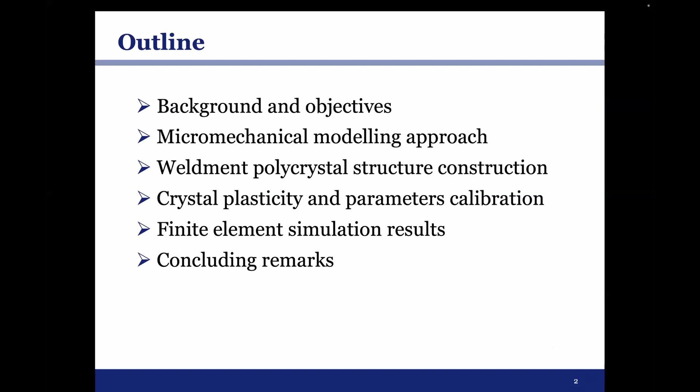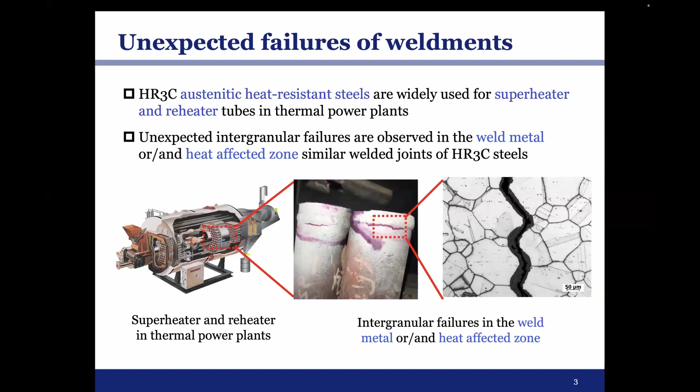So here is the outline of my talk. I'd like to begin with background and objectives. We performed this work because our industry partners found that in their superheater and reheater in power plants, there are some unexpected failures of the weldments. These weldments are used to join heat resistant steel tubes. After careful examination, they found that these failures are due to intergranular cracking.

For us, it's quite challenging to understand this kind of failure both qualitatively and quantitatively because there are many influencing factors. The loading conditions during service are quite complex, such as creep and fatigue and their interaction. The welding process itself also induces complexity. For example, it affects grain size and morphology, introduces carbide precipitation, and also residual stress and distortion. And the material itself during service undergoes changes of microstructure and properties, such as carbide precipitation at grain boundaries, which probably leads to the final failure.

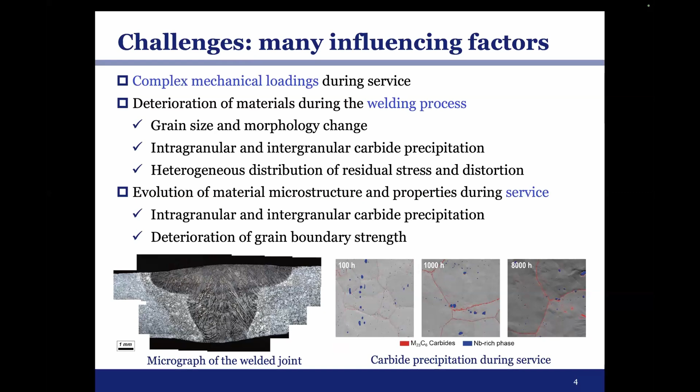The main objective of our work is to reveal the physical origin of this unexpected failure of the weldments, and also to predict the in-service life of the weldments considering microstructure changes. For that purpose, we propose a bottom-up modeling approach to address these three kinds of issues. Today I will talk about microstructure-related heterogeneous deformation and damage.

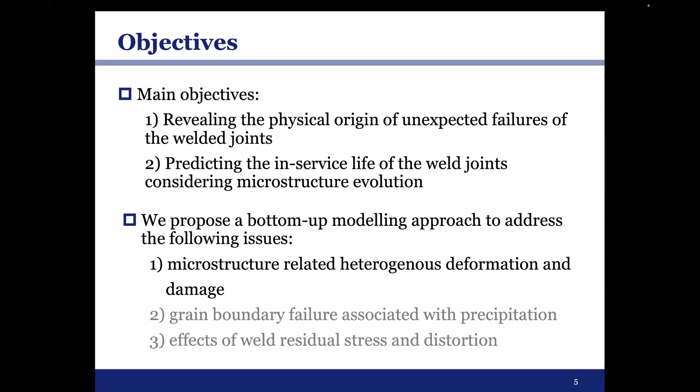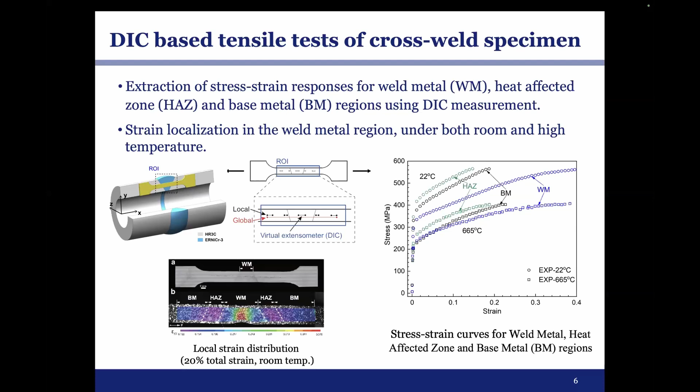To begin with, we conducted some experiments. We machined cross-weld specimens from the welded tubes and performed tensile tests at different temperatures with DIC measurements. From the tensile tests, we can extract stress-strain curves not only for the whole specimen, but also for different regions: the weld metal region, heat affected zone region, and base metal region. We also have full field strain measurements. For this specimen after the tensile test, there is a strong strain localization in the middle part, the weld metal region.

To model this behavior, we propose a micro-mechanical modeling approach. First, we construct a representative microstructure model according to careful microstructure characterization. Then we use a crystal plasticity model to describe the elastoplastic behavior of the grains. Then we need to calibrate the models, in two ways. One is simple tension of simplified polycrystal aggregates, fitting the experimental data we obtained for each region from the tensile test. Additionally, we do compression micropillar tests to further confirm our parameter calibration. Then we can use this model to study different behaviors of this weldment.

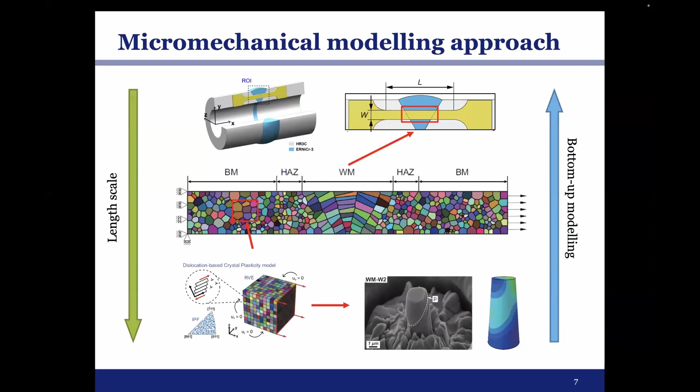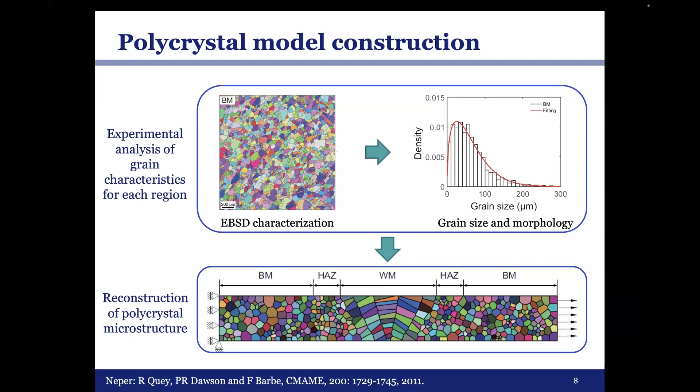Following this approach, we first construct the microstructure model. We do EBSD measurements to gauge the statistics of the grain size distribution as well as the grain orientation distribution. Based on this information, we construct the microstructure model considering grain size distribution using software named Neper. Then we use the single crystal plasticity model to do simulations. The model we used is quite classical; I won't go into the details of these equations. What I want to emphasize is that we use the same model for different regions of the specimen, but with different parameter values.

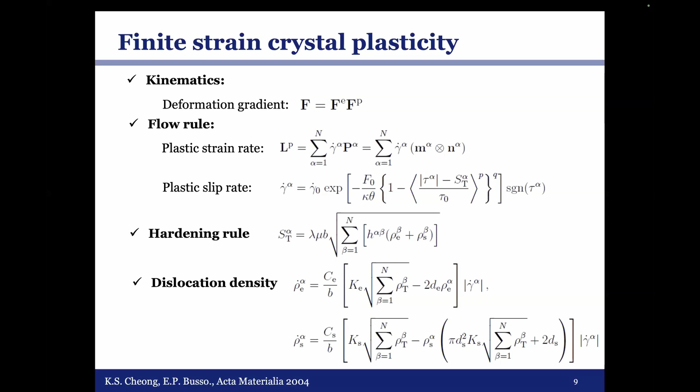First, we need to calibrate the crystal plasticity model. We run finite element simulations using simplified polycrystal aggregates to fit the stress-strain curves obtained from the tensile test. As we can see here, there is good agreement between the experiment and the simulations for two temperatures, room temperature and 665 degrees.

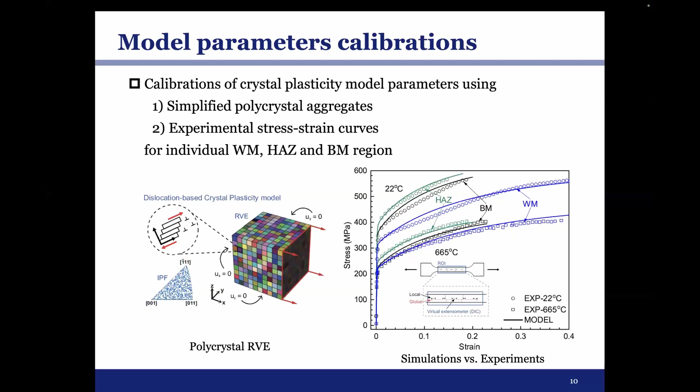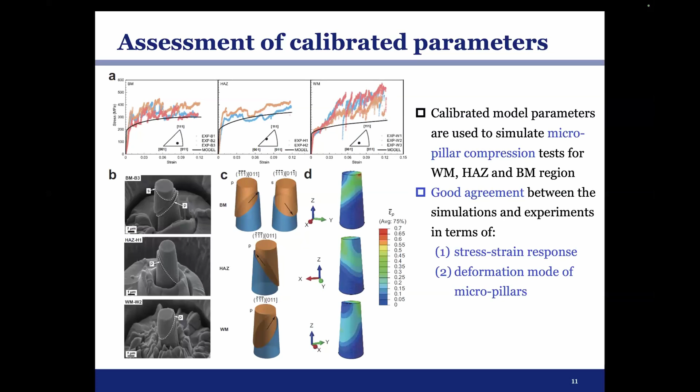However, such calibration may raise one question: whether these parameters are good enough to describe an individual single crystal. To confirm this calibration, we do micropillar tests for the three regions: base metal, weld metal, and heat affected zone. We use the parameters calibrated with tensile test data to see whether they are good enough. As we can see, there's good agreement between simulation and experiments in terms of the stress-strain response as well as the deformation mode of individual micropillars.

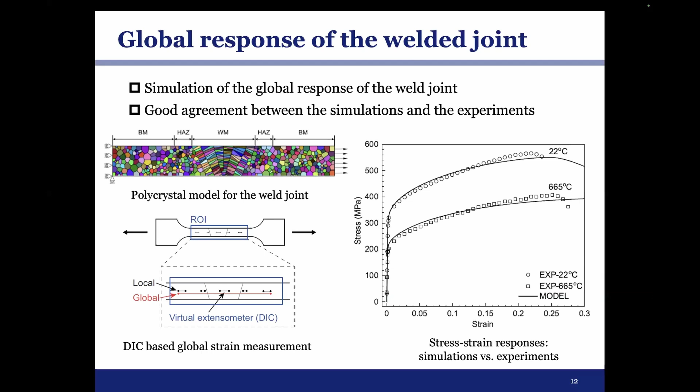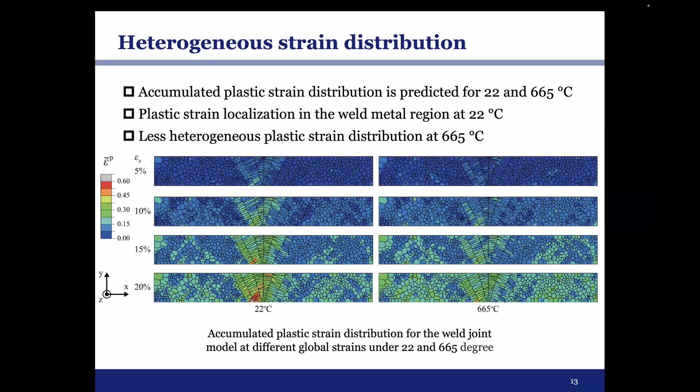With these parameters well calibrated, our first step is to simulate the response of the whole specimen. As we can see, we achieve good agreement in terms of the stress-strain curves for the whole specimen for the two temperatures. We also calculate the distribution of accumulated plastic strain for two temperatures and found a strain localization in the middle part, the weld metal. However, this plastic strain distribution is more diffuse at high temperature, because of more viscosity at high temperature, which is in good agreement with our experimental observation.

Based on the same model, we can do more. For example, we would like to predict the creep rupture time. There are many ways to do that; we do it simply by introducing some indicators. One is cumulative plastic strain, another is a dislocation density based indicator. We use one experimental data point to calibrate the critical value of these indicators and try to predict the others. We obtained good agreement for lower stress levels, but some discrepancy for higher stress levels, probably because of physical mechanisms we haven't considered.

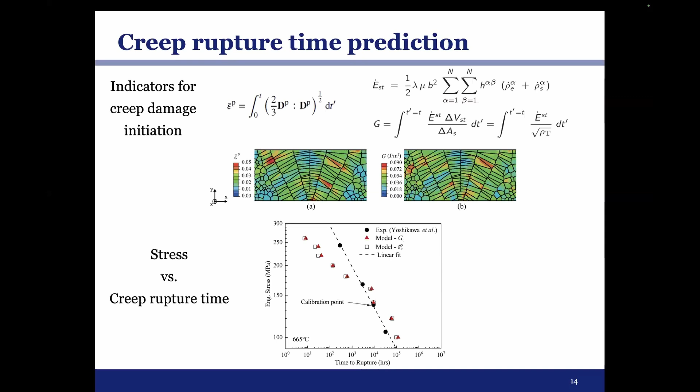We have also tried to simulate the ductile fracture of this cross-weld specimen under tension. We use a GTN type model for only the middle part, the weld region, and run the simulations. We predict the stress drops with this model, and also the evolution of the damage parameter in this middle part.

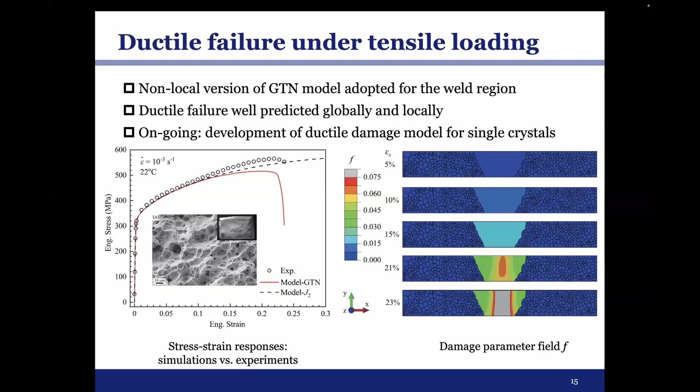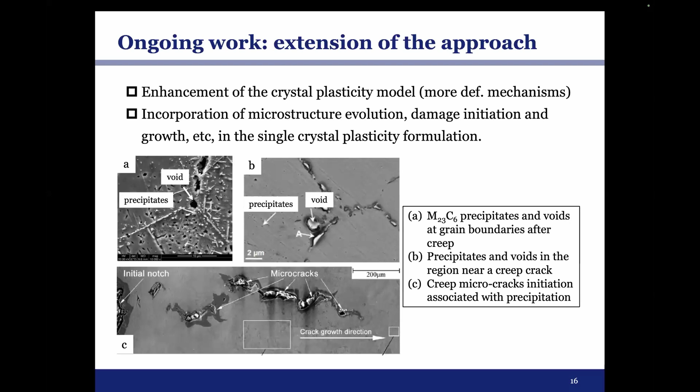The work is still ongoing. As I talked about in the introduction, the creep of this weldment is quite complex, so we need to enhance the model. For example, we want to consider more deformation mechanisms in the single crystal plasticity framework, such as diffusion-induced deformation. We also need to incorporate the mechanisms that induce failure, such as carbide precipitation at grain boundaries. So that's my talk, and there are some concluding remarks.